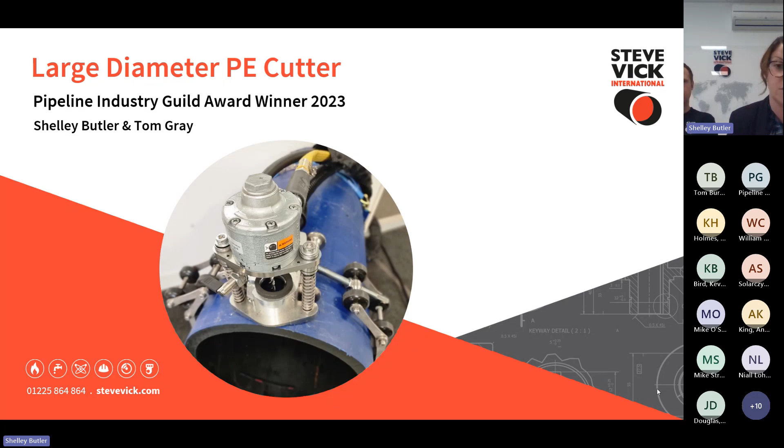The first 3 years saw the introduction of live gas mains insertion products, and in 1990 the company moved to a building in Bath with a handful of staff, and the directional drilling side of the business began. In 2002, with the start of the 30/30 programme, the company refocused the business on services to the gas distribution industry, leading to further innovations of pipe handling and cutting equipment.

In 2014, we moved to larger premises in Bradford-on-Avon. With the company continuing to grow, we have since taken on further buildings in the area to support our contract services and smart tester departments, and are now at over 100 staff across the country.

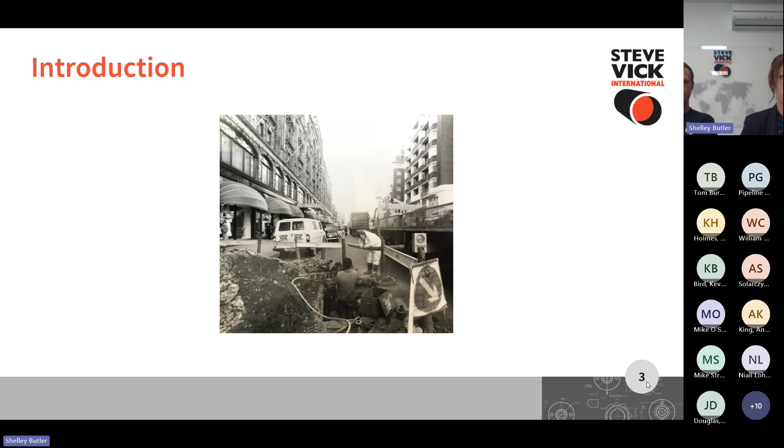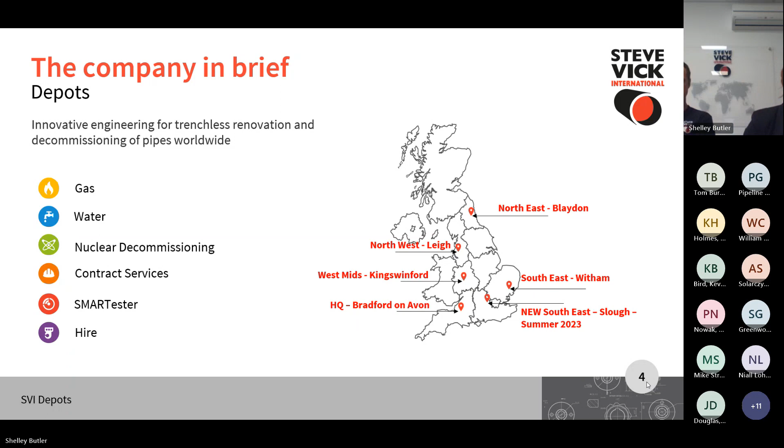Now moving on to the main event, I will talk about why and how we developed our PE pipe cutter. Cutting large diameter PE accurately is difficult, and existing technology comes with health and safety concerns. A handsaw is safe, but can be extremely laborious and time-consuming, and other handheld cutting devices have become non-preferred in a trench environment.

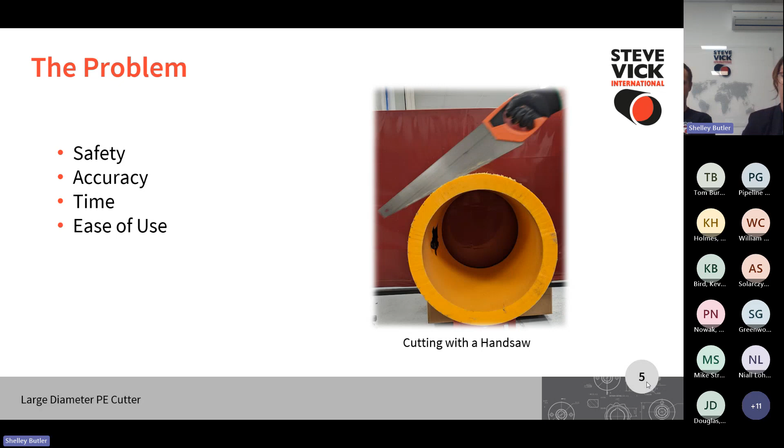An existing product in our range is the keel cutter, which can be used for this application, but it's prone to slipping on the pipe's smooth surface. And the circular cutting disc leads to a machine that sits relatively high in profile on smaller diameter pipes. The keel cutter is also designed for metal, making it slower and heavier than a device optimized for use on PE.

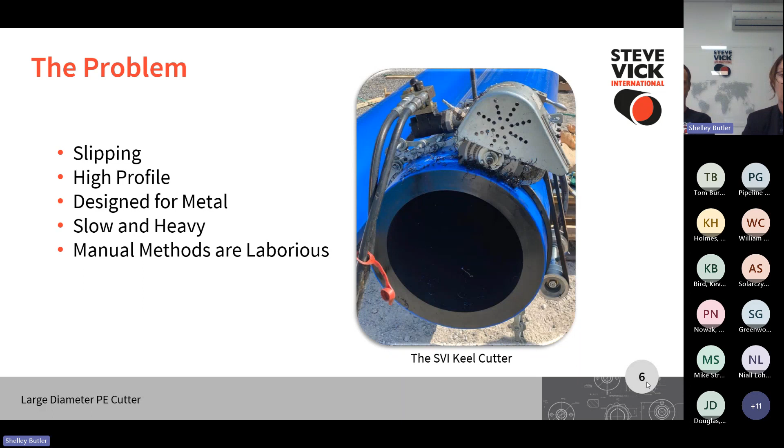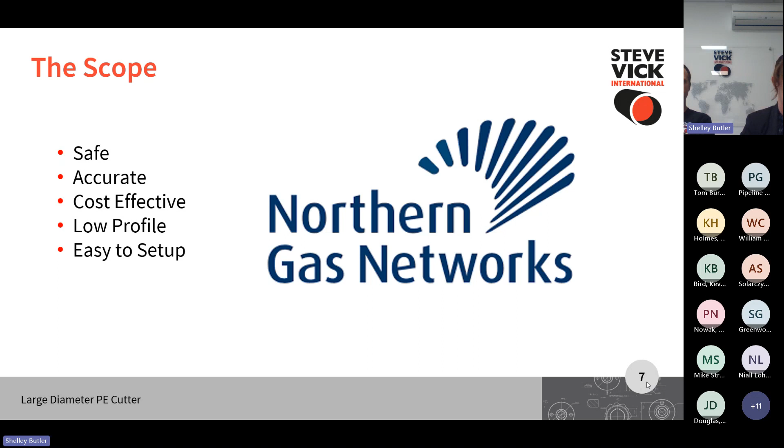We were approached by Northern Gas Networks in late 2020 with a challenge of finding a new method that is safe, accurate, and cost-effective. With innovation being at the forefront of our business, we set ourselves two additional goals of making a low-profile machine to reduce excavation size, and ease of setup in all conditions.

We developed the design over 18 months using our mill and lathe to rapidly prototype components as our ideas evolved. This allowed us to move through concepts quickly without external delays from suppliers. As part of this work, we created a custom pneumatic control system to meet the required safety standards.

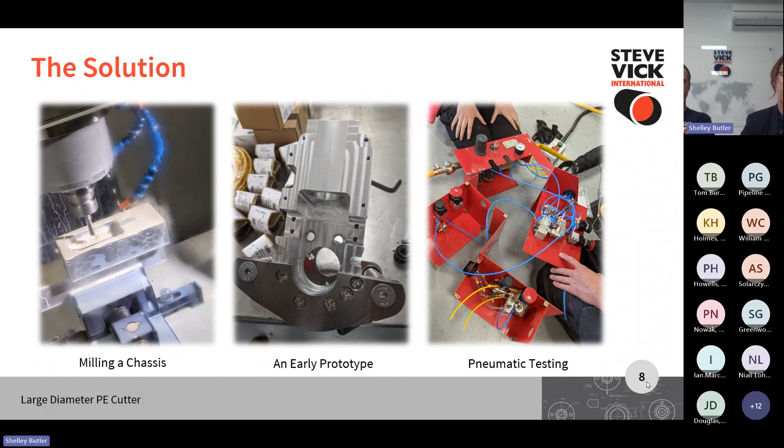This led us to our final design. Rather than a circular disc, the machine uses a custom mill tool attached to a 1 horsepower pneumatic motor.

To perform a cut, you first plunge the motor into the pipe where it automatically locks in place. You can then begin cutting by pushing the machine around by hand. When the cut is complete, you simply turn the lever over on the front and the unit releases from the material.

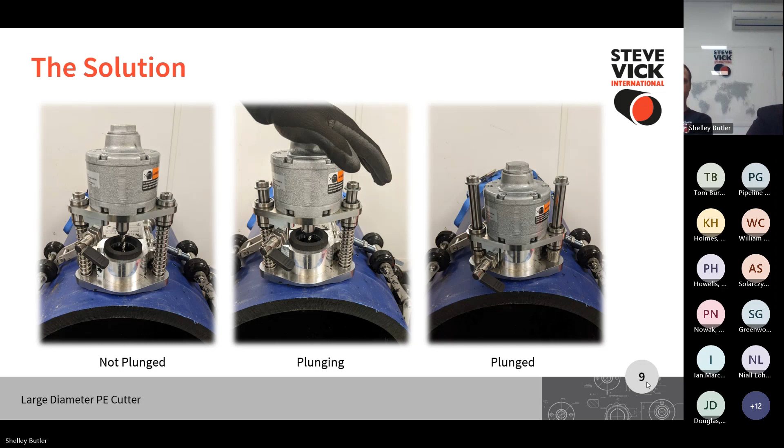The machine is mounted on a tailor-made chain designed specifically to maintain grip on a smooth surface, and will cut any size diameter pipe by adding additional chains, a concept very similar to our keel cutter.

The motor is powered by a standard site compressor, and we're also developing an electric version which is more favourable within the water industry. An extra feature is that exhaust air from the motor is used to generate a vacuum, which draws 98% of the swarf away from the cutting area into a bag located in the tin. This reduces the amount of microplastics introduced to the environment, which is also more favourable within the water industry.

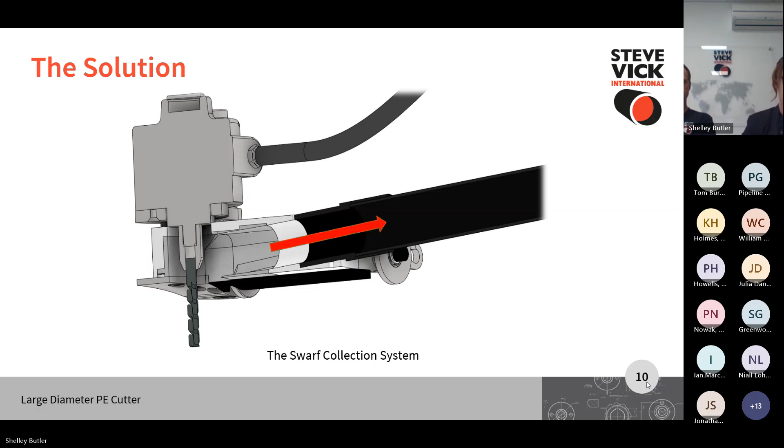Our machine can tackle pipe larger than 250 mil in diameter and with a wall thickness of up to 70 mil. You can quickly change between cutting tools depending on the thickness of the pipe you are cutting.

On the left, we have a thick 800 mil pipe that we cut in just over 5 minutes. On the right, we have the machine on a field trial at site in Chelmsford, cutting a 400 millimeter pipe in just over 2 minutes.

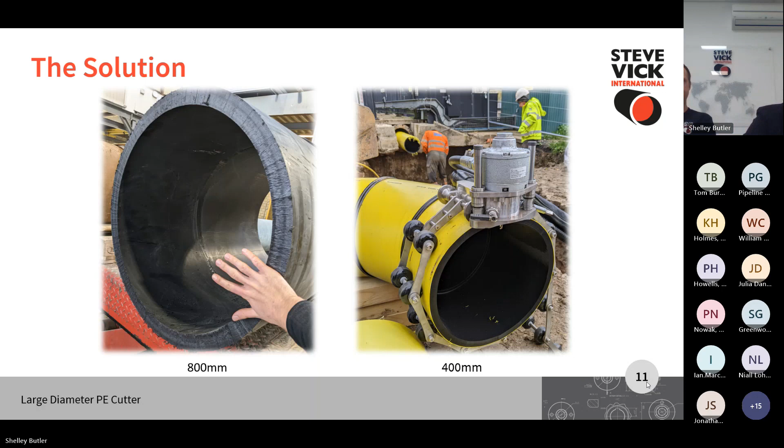8 initial units were made as part of the development and are now being trialled and tested in Switzerland, Denmark and the USA, as well as across the UK. Feedback from the tests has fed into our production model that is now available for hire. This development has allowed this product to make a positive impact across not just the gas, but also water and the broader utility sector.

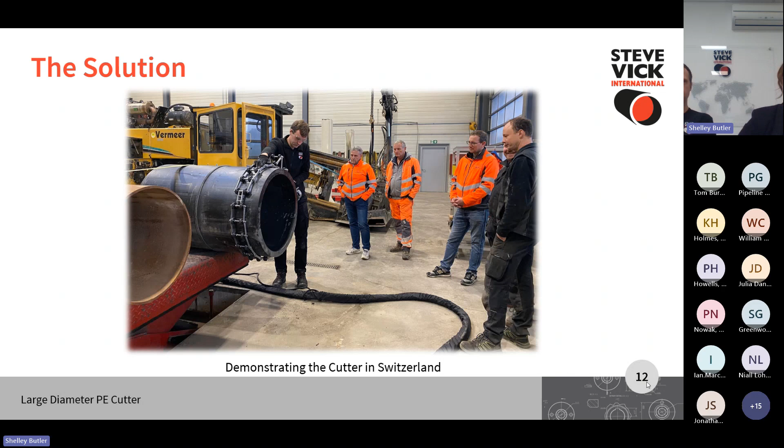The cutter is safe, accurate and easy to use, and we have a patent on the design due to its unique cutting method. This successful innovation has now been approved within NGN and will soon be adopted by the other gas distribution networks. Considering the Tier 2 and Tier 3 replacement programme in the remainder of GD2 and looking towards GD3, the GDNs have very much welcomed the timing of this product coming to market.

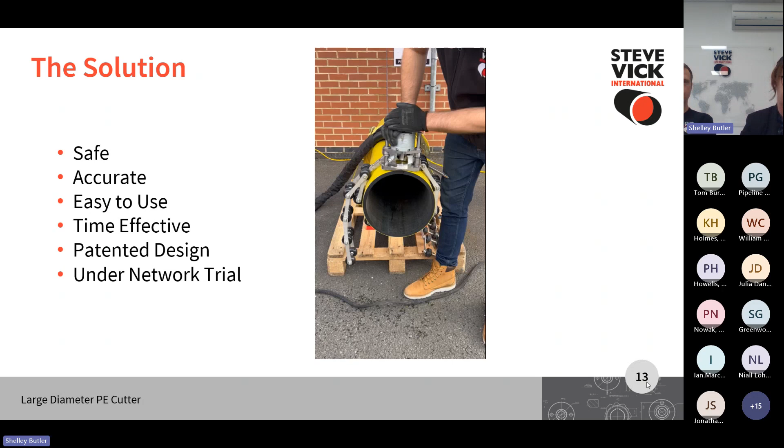Thanks, Shelley. There's nothing in the chat at the moment. If anyone's got anything, then please post them. Julia's just come up with one: what's the next product development for Steve Vick?

Currently we're working on a small diameter window cutter used for accessing services in the garden, which allows you to keep the excavations in someone's garden down to a small scale. This will create straight linear cuts, and then the circumferentials will be finished off with a reed cutter. This reduces the fatigue on the operator, and means it can be operated remotely from outside the trench, so no one has to work in a confined space or anything like that. So that's something we're working on at the moment.

It's really interesting and is nearly there, to be honest. We're not far off field trials now. To answer your question, Julia, anything else to follow up? If not, I'll pass on to Mike Straton. Mike, you got your hand up? Do you want to join the group?

Yes, thank you. Thanks, Shelley and Tom. Couple of questions. What's the weight of the unit? Overall, it's about 20 kg, including the tin and the actual motor itself. To handle the motor on its own is probably under 10 kilos.